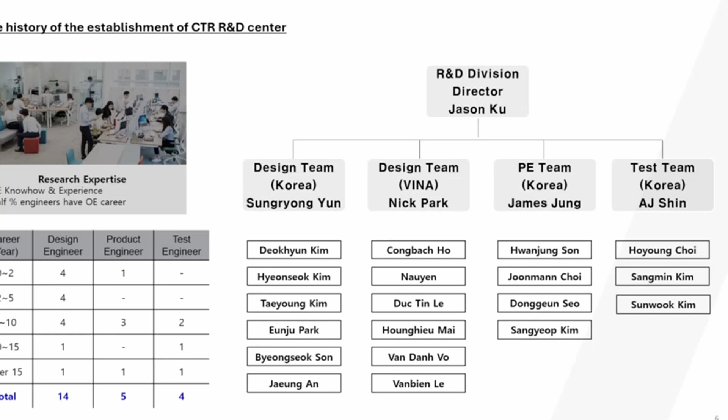We have a diverse and specialized team of researchers. Our greatest advantage is that half of our research staff have design and development experience in the OE sector. CTR core technologies have already been patented worldwide.

We use the latest design and analysis tools to achieve the optimal design that ensures customer satisfaction. Unlike our competitors, CTR conducts in-house analysis and simulation.

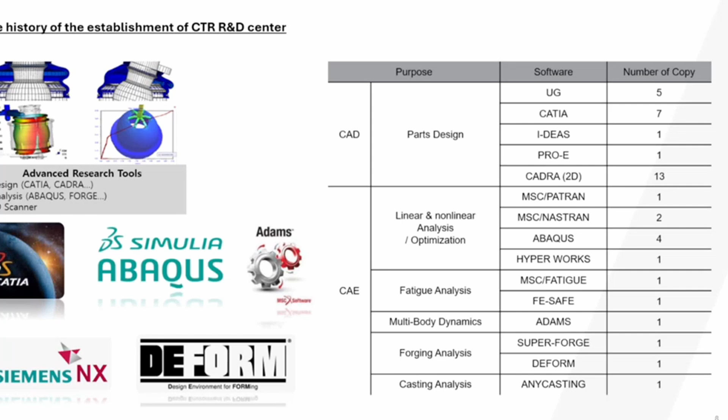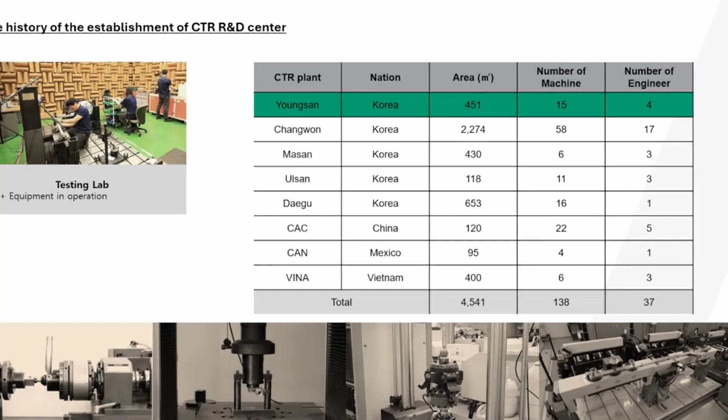All our CTR development products are verified through testing equipment. We are equipped with expert engineers and machinery to create products that meet OE level performance and quality standards.

CTR, as a specialized manufacturer of steering and suspension parts, has material development capabilities. A prime example is the special grease we developed for a ball joint, which is applied to both OE and AM products.

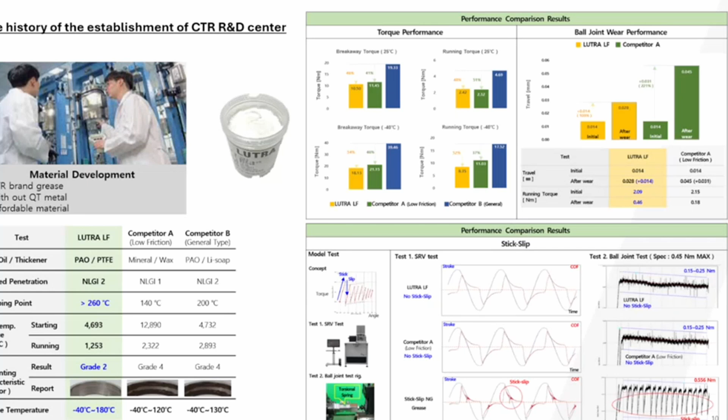We have a specialized 5-step development process. It includes the project kick-off, design, analysis, fabrication, and finally uploading information to the catalog.

The R&D Center of the AM division follows the same procedure as the OE R&D Center. The first step is identifying the product requirement, such as durability and fatigue life.

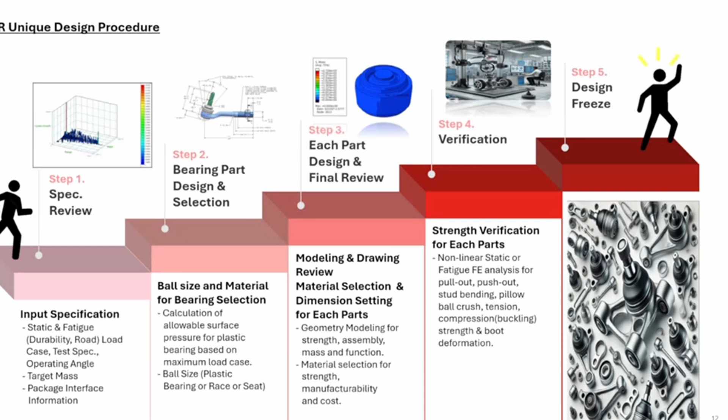In the second step, we design the prototype and select the material. In the third step, we confirm the final design through detailed design and analysis. In the fourth step, we verify the strength through testing. Lastly, if our process passes, the design specifications are finalized for production.

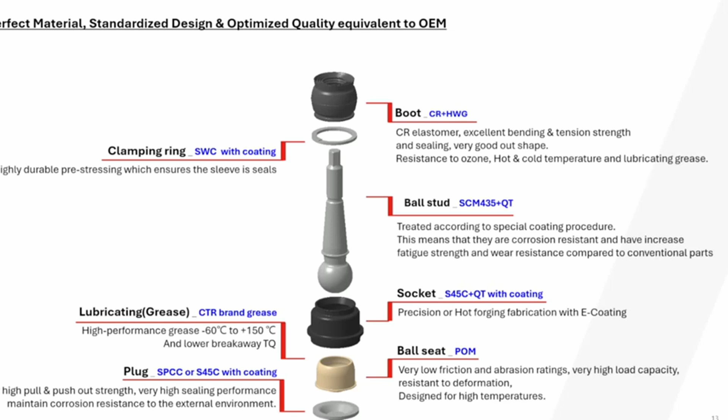CTR ball joint and outer tie rod use the same material and production process as the OE parts. The R&D Center of the AM division follows the same procedure as the OE R&D Center. CTR's philosophy is zero defect. CTR shares experience and know-how between its OE and AM manufacturing systems.

This video is about the CTR manufacturing system.

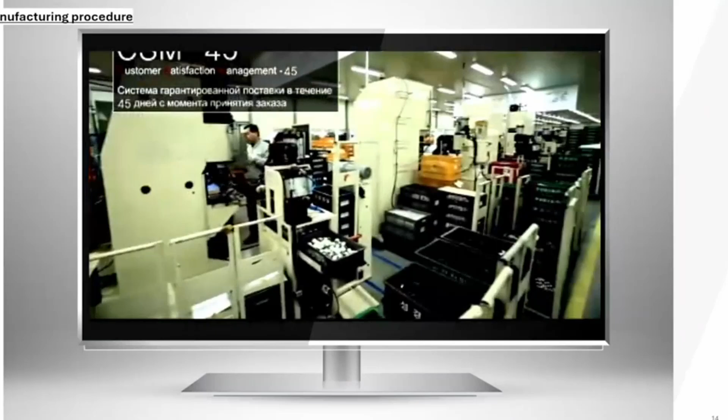Next, we'll explain how the suspension is constructed and where it is mounted. CTR core products include the ball joint, control arm, stabilizer link, rubber bushing, and cross-axis ball joint.

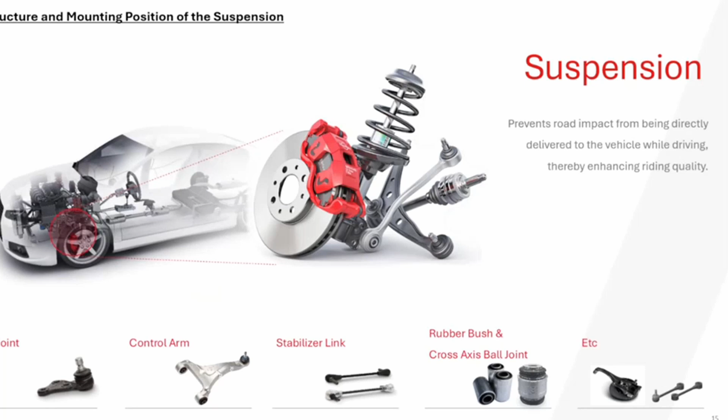The main function of the ball joint is to connect the knuckle to the control arm, allowing vertical movement of the tire and steering movement. During the vertical movement of the vehicle, the ball stud articulates around point A. During steering, the ball stud rotates around the axis point AB.

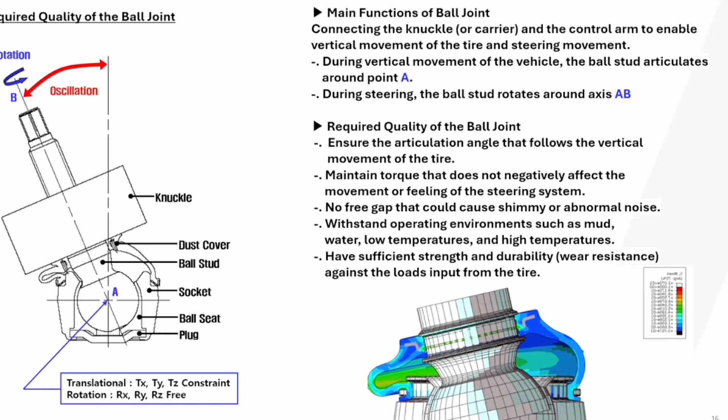There are 5 important required qualities for a ball joint. First, ensure the articulation angle that follows the vertical movement of the tire. Second, maintain torque that does not negatively impact the movement or feeling of the steering system. Third, no free gap that could cause shimmy or abnormal noise. Fourth, withstand operating environments such as mud, water, low temperature, and high temperature. Last, have sufficient strength and durability against the load input from the tire.

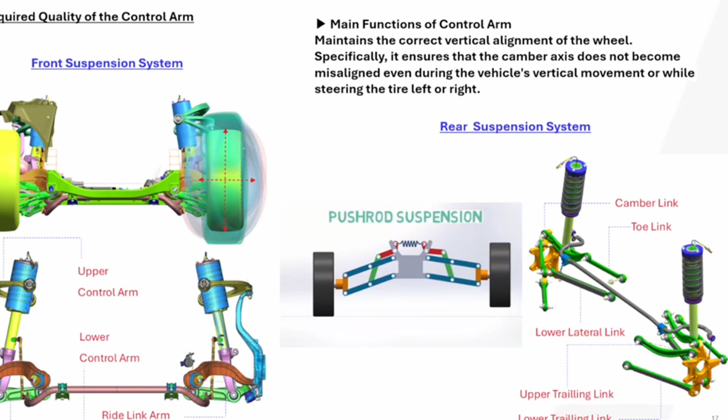The main function of the control arm is to maintain the correct vertical alignment of the wheel, ensuring that the camber axis does not become misaligned even during vehicle vertical movement or while steering the tire left or right.

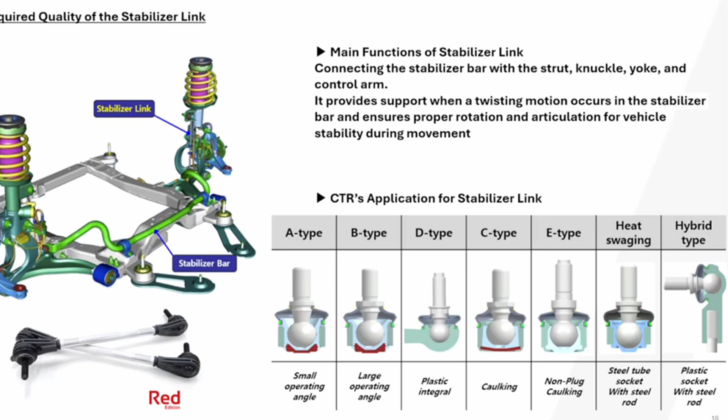The main function of the stabilizer link is to connect the stabilizer bar with the strut, knuckle, and control arm. It provides support when twisting motion occurs in the stabilizer bar and ensures proper rotation and articulation for vehicle stability during movement. The stabilizer link of CTR has a wide range of applications, depending on the size of the vehicle and the quality required.

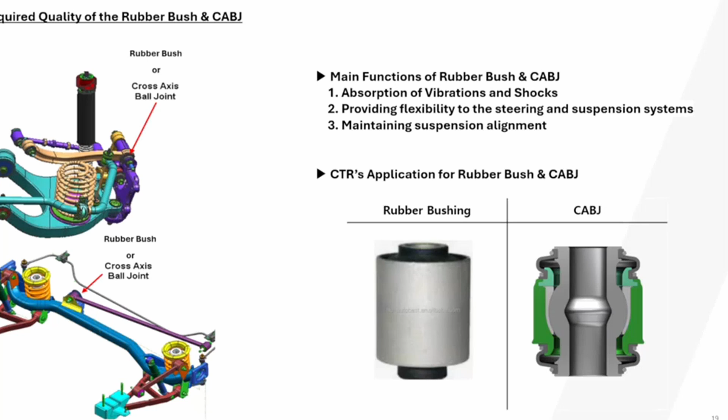Next, we'll explain how the steering parts are constructed and where they're mounted. CTR core steering products include the outer tie rod and inner tie rod.

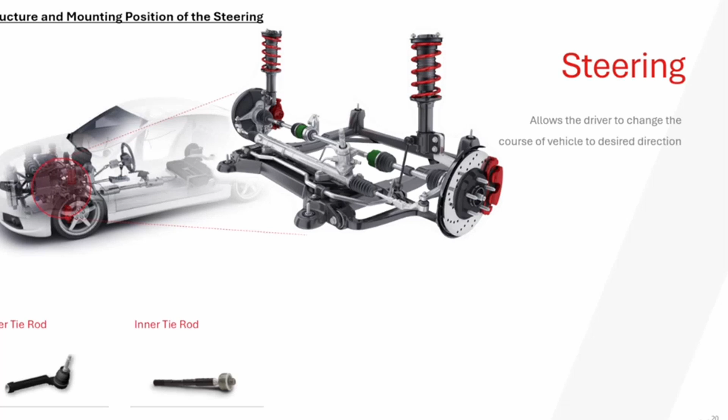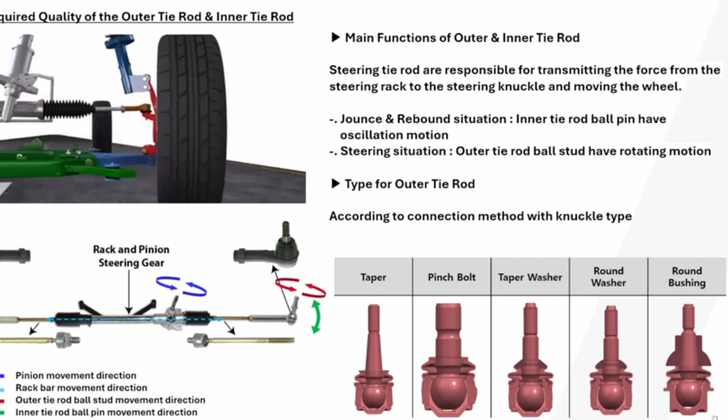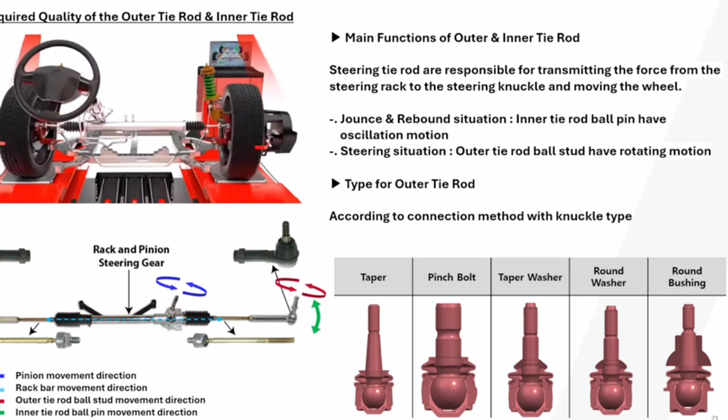The main function of the outer tie rod and inner tie rod is transmitting the force from the steering rack to the steering knuckle, the wheel. The outer tie rod, the CTR, has a wide range of application depending on the installation method and quality required.

And finally, how to use the CTR web catalog. Let's watch the video to learn more.

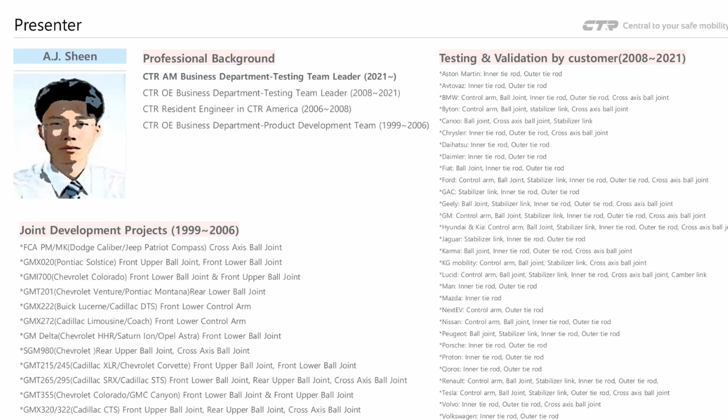This is AJ speaking. I'm in charge of the CTR test lab. As you know, CTR has been supplying ball joints to almost all global automakers for a long time, meaning CTR ball joints are installed in vehicles almost everywhere in the world. In other words, we are very familiar with the extreme environmental conditions around the world. Based on that, I'd like to share our engineering information and knowledge with you here.

This is what I'm going to talk about today. First, let's take a quick look at what a ball joint is. Next is what happens if the joint is separated, what types of joint separation there are, and what are the root causes of them. And last, I'd like to cover what the preliminary signs are before joint separation.

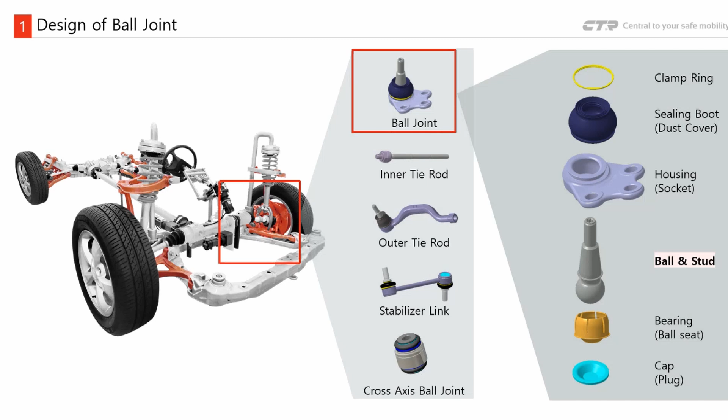Today's topic is joint separation from a car. At this point, we need to be familiar with the name of each joint component: cap, bearing, ball and stud, housing, sealing boot, and clamp ring. Before we jump into the next slide, please remember the names of these components.

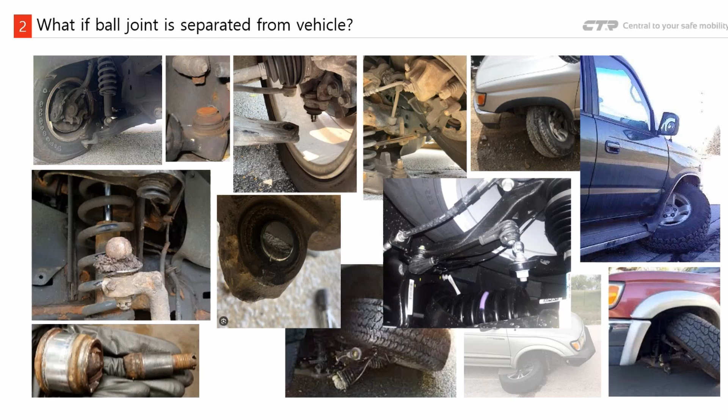If a ball joint becomes separated from a car while it's in motion, it can have serious consequences for the driver and anyone else on the road, because this can lead to steering difficulties or loss of vehicle control, making it difficult to drive and potentially causing accidents. That's why ball joints are designated as safety parts in the automotive industry.

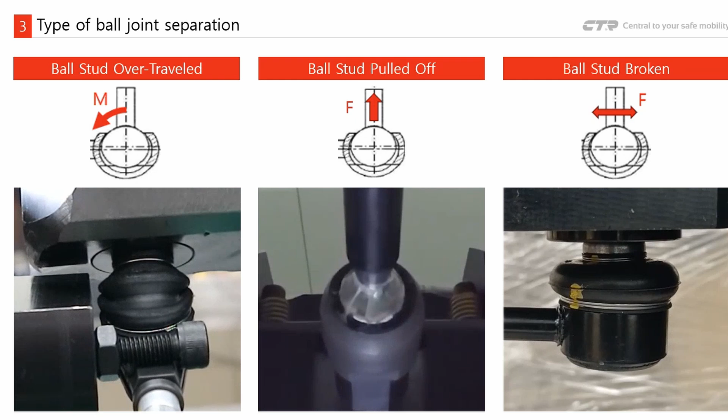In the next slide, I will have the opportunity to look at what evidence remains for the 3 failure modes respectively.

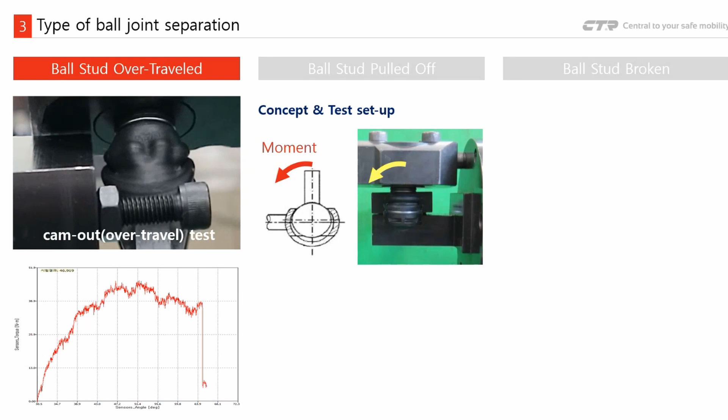This is showing the concept of how ball and stud is separated from housing by over-travel failure. When the ball and stud is tilted and begins to touch the housing, the leverage effect is working. When you look at the parts where ball and stud is over-traveled and separated from housing, we can see a permanent dent on the upper part of the housing, and the stud is bent, but not always. This is because ball and stud generally has the strongest hardness among joint components.

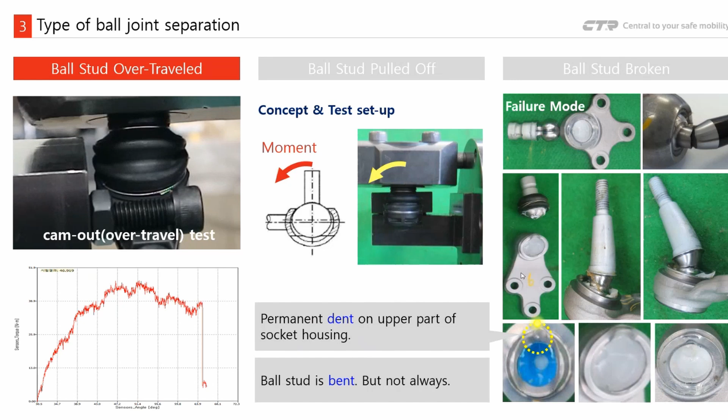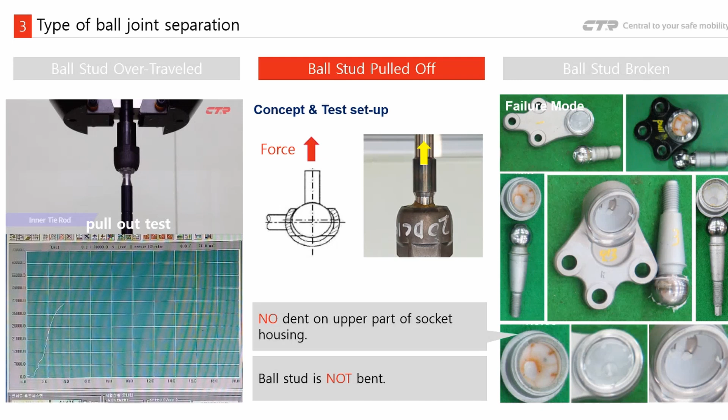This is about how ball stud is broken by dynamic cyclic stress. When you take a look at the general failure mode of it, there is no dent on the upper part of the housing and no bending deformation of the ball stud, but it is just broken. This is a typical failure mode for dynamic cyclic stress fatigue.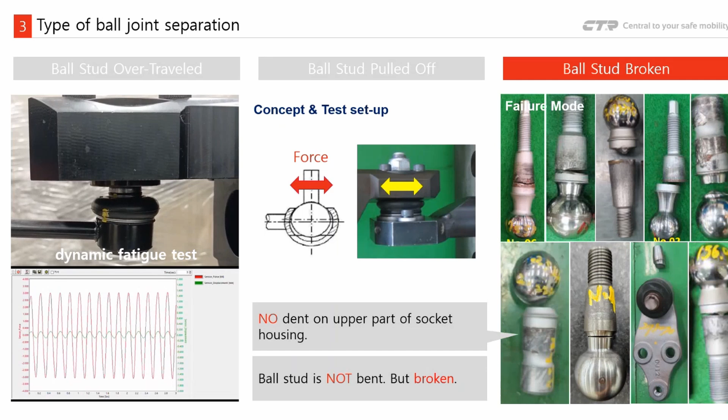Now let's recap the previous failure modes. If you remember the differences among these failure modes, we may be able to tell at a glance what happened on them. The appearance sometimes gives us some idea of what type of separation has occurred.

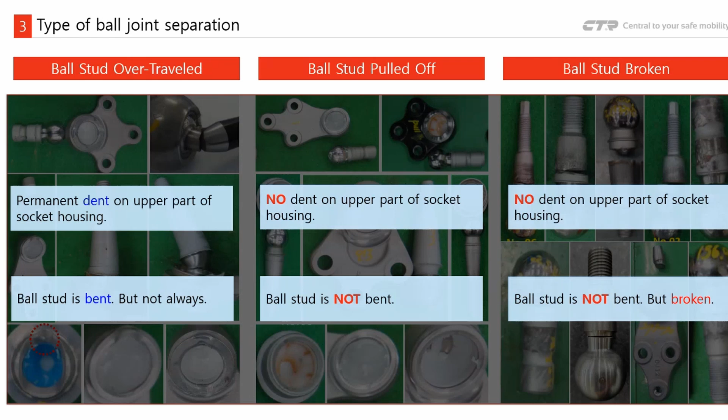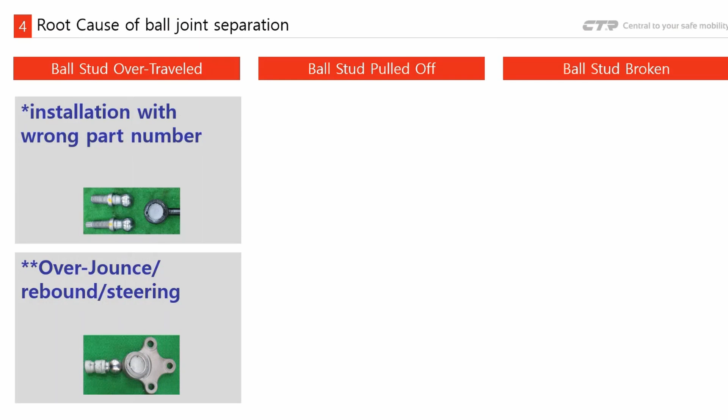Now let's learn about the root causes of these separations. There are two main root causes in regard to balls that over-traveled. Regarding balls that pulled off, there are two main root causes. When it comes to balls broken by dynamic cyclic stress, there are three main root causes. Now let me talk about them in detail one by one in the next slide.

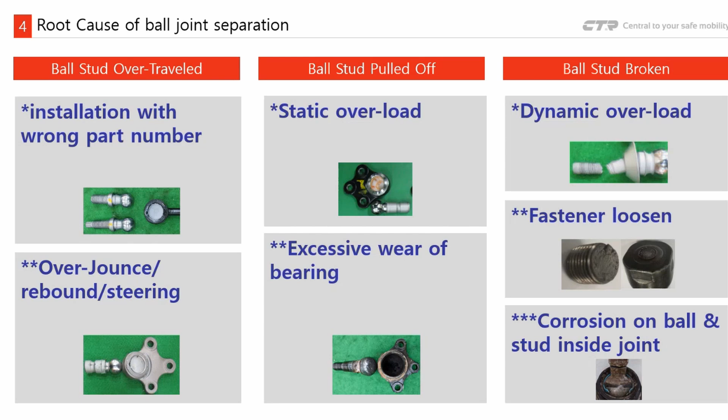This is about one of the root causes of balls that over-traveled: installing with the wrong part number. For example, a part number for the right side of a vehicle is mounted on the left side, or vice versa. Installing different part numbers could cause problems in the maximum operating conditions of the suspension or steering system. That's because permanent deformation of the stud begins to occur if it goes further than the blue zone shown in the middle picture.

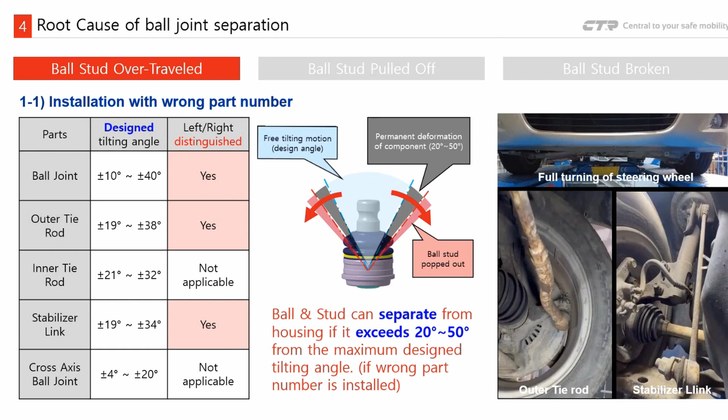Ball joint, outer tie rod, and stabilizer link may all have different part numbers on the left and right side of the vehicle. This problem mainly occurs in the stabilizer links. Therefore, please make sure your vehicle's left and right part numbers are different or the same before installing these parts.

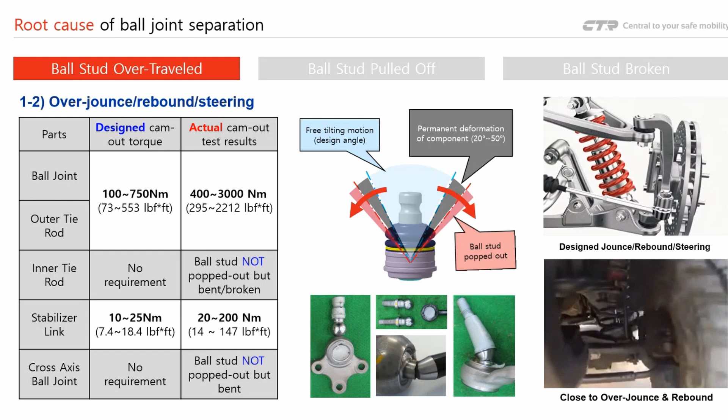Here I want to talk about another root cause of a ball stud over-traveling: over-jounce, over-rebound, over-steering. The table on the left shows the designed cam-out torque values and the actual test results for each joint type. Stabilizer links typically have lower torque values than the ball joints and outer tie rod due to the smaller ball size. Therefore, stabilizer links tend to have more problems with balls that over-travel than other joints.

This is about one of the root causes of a ball stud straight pulling off: static overload. The graphs here show ball and stud pull-off requirements and the actual test results for each joint type in the global automaker database. For example, the graph in the top left is about the upper ball joint.

The X-axis on the graph means the ball sizes, and the Y-axis is pull-off force values. What's interesting here is that as ball size increases, the pull-off requirement does not increase proportionally. In other words, there's no pull-off force increase in the actual car, regardless of vehicle type or weight.

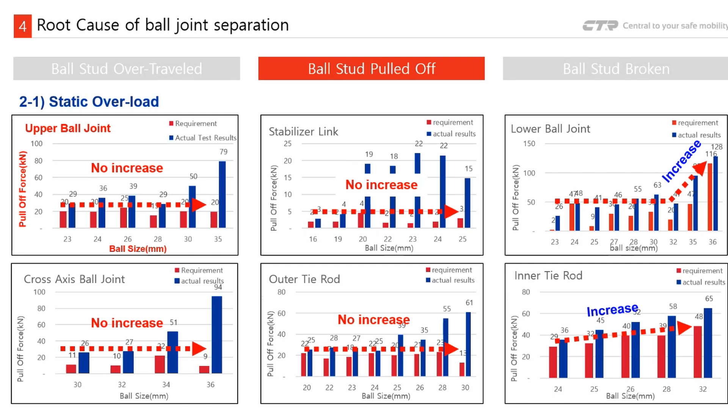The same goes for stabilizer link, cross-axis ball joint, and outer tie rod. However, for inner tie rod and lower ball joint, as the vehicle becomes heavier, the stud pull-off load tends to increase proportionally. As a result, it can be predicted that stud pull-off separation due to overload is very unlikely to happen in a real vehicle.

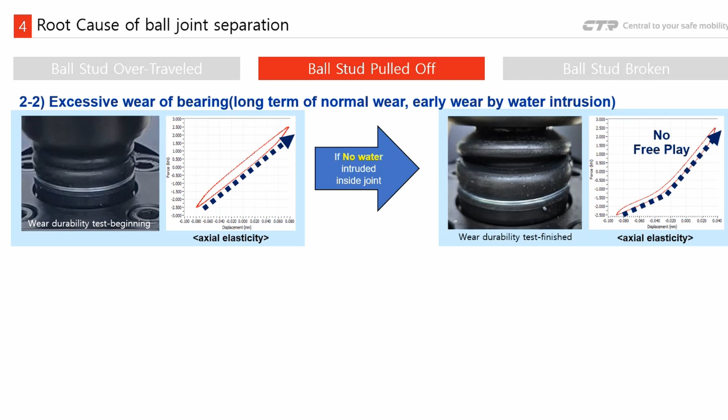After the wear durability test is done with a good part, the graph could be slightly curved like this—it's still good. However, if foreign matters or water enter inside the joint, or the vehicle is driven beyond the designed mileage, the axial end travel curve lies horizontally in the middle part of the graph, as shown in the picture. We technically call this free play, which may produce noise or vibration in the car.

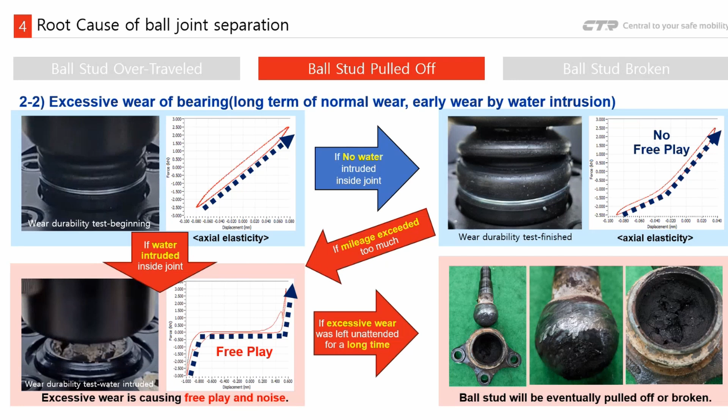If this condition is left unattended for a long time, the stud eventually will be pulled off or broken. In other words, this can happen if the driver has not had a chance to notice the various symptoms of the problem.

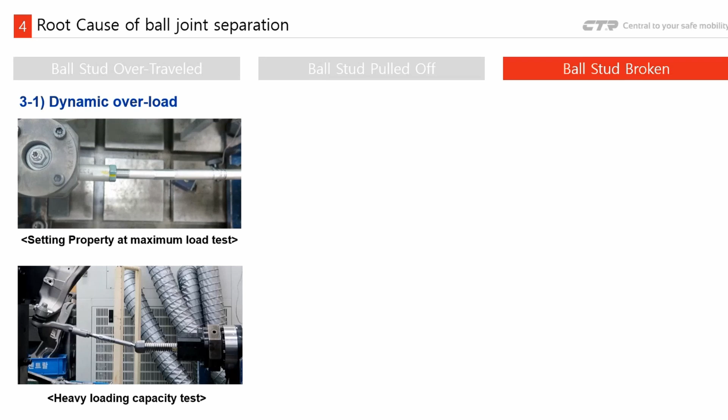This is about one of the root causes of a ball stud breaking: dynamic overload. In the automotive industry, joint suppliers conduct a test based on the assumption that a vehicle would be subject to high loads close to its yield point, one time to one hundred times over its lifetime. When heavy load is applied, as shown in the video on the left, the part experiences elastic deformation repeatedly.

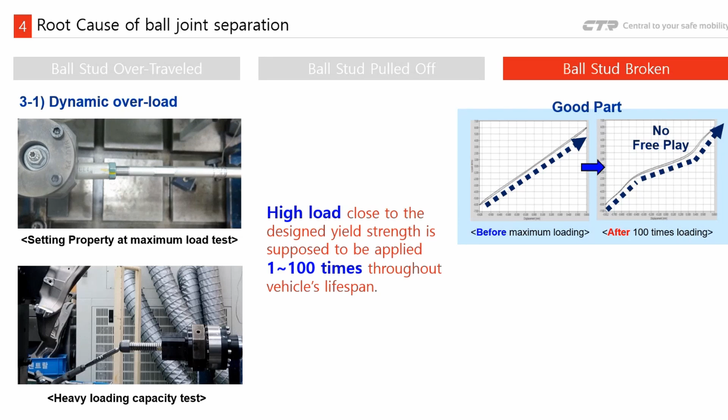After the test is successfully completed, the axial end travel curve on the joint could be slightly bent in the middle part of the graph, though there should be no screw loosened nor broken parts. If the test fails, there could be free play, a loosened screw, or a broken component.

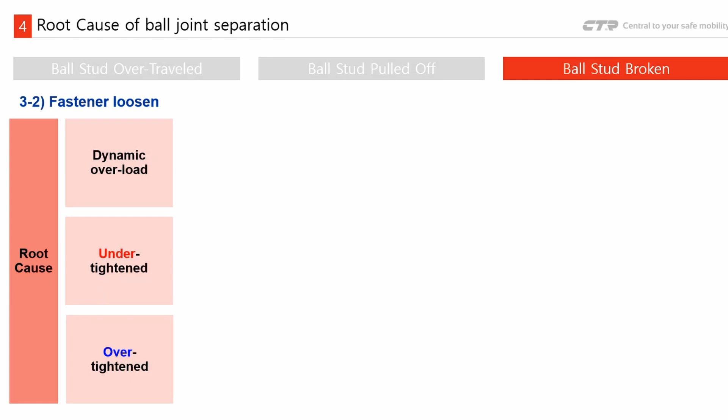There's another root cause of a ball stud broken: loosening of screws. If your vehicle's screws become loose, they will initially make noise or lose functionality of the part, eventually causing parts to break.

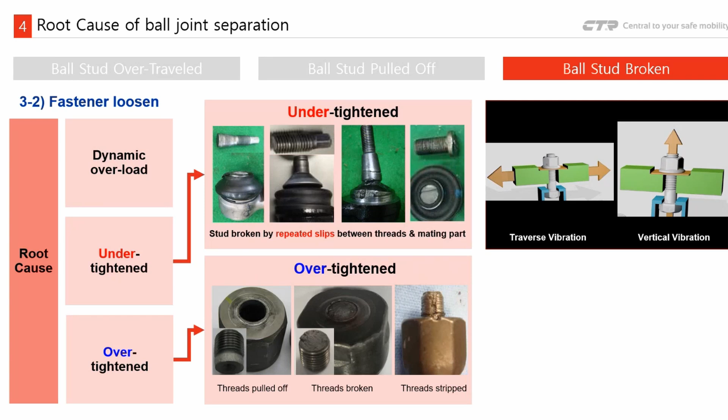If we tighten a screw lower than the specified values, the screw may loosen while the vehicle is in motion. On the other hand, if we tighten a screw too strongly, beyond the yield stress, the screw may also break. I'd like to give a little bit of a principled explanation as to what's going on.

In general, tightening torque conditions are determined within the elastic region. However, if tightened outside the elastic range, the screw may be permanently deformed or broken if extra load is applied to the car in motion. That's why screws must be properly tightened according to the instructions provided by automakers.

This is the last root cause of a ball stud broken: corrosion inside the joint. As previously explained, with excessive wear of the bearing, the end travel curve should be linear at the beginning. But if there's water intrusion inside the joint before or during testing, the steel component inside the joint gets corroded and may produce noise or vibration in the car, like this.

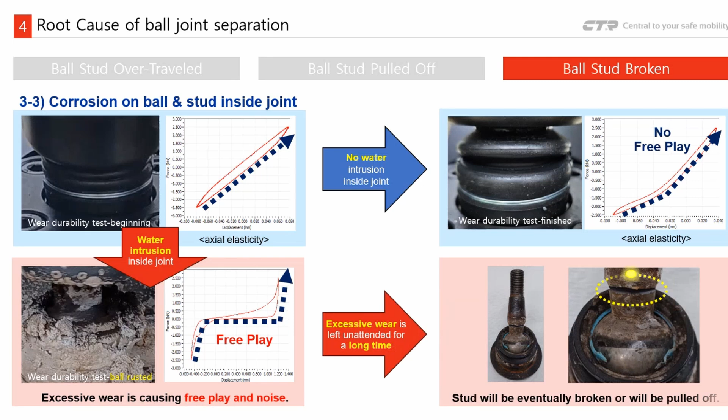If this condition is left unattended for a long time, the stud eventually will be pulled off or broken. Now let's find out what preliminary signs appear before the joint is separated.

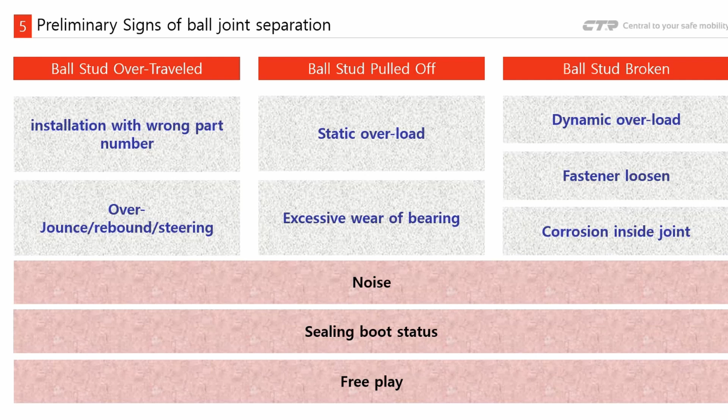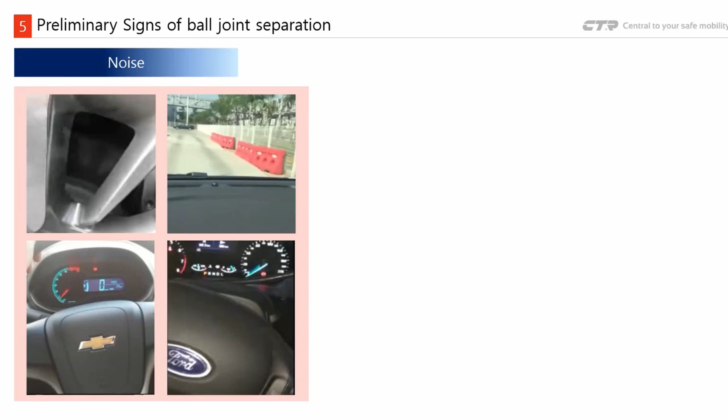These are preliminary signals before separation of the joint: noise, sealing boot status, and free play. The preliminary signs listed here are ones that drivers may recognize and notice on a regular basis. If a driver begins to hear noise from a vehicle's steering or suspension system, it must be a preliminary sign that there is a problem with the components.

Here are some examples of noise generated by joints: a squeaking noise here. In reality, this squeaking noise does not occur directly inside the joint. A slight vibration occurs at the joint first, and the vibration is amplified in the connected part, resulting in noise.

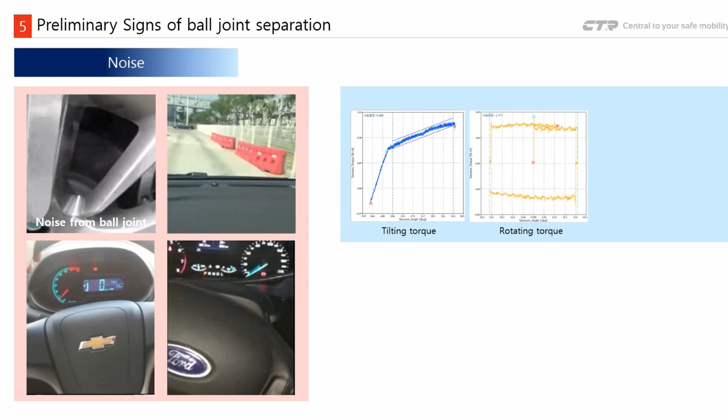We measure the friction torque of a good joint. It'll look like this, but a noisy part will look like this—this spike shape in the friction torque causes vibration inside the joint, eventually resulting in noise in the connected part.

Now let's listen to another type of noise: clunk noise from a stabilizer link. This noise comes directly from inside the joint of the stabilizer link. When you separate the part from the vehicle and measure its axial end travel, the good part will look like this—it's linear.

However, the noisy part will look like this, showing typical free play inside the joint. Let's listen to another noise that can be heard from inside the car when operating the steering wheel.

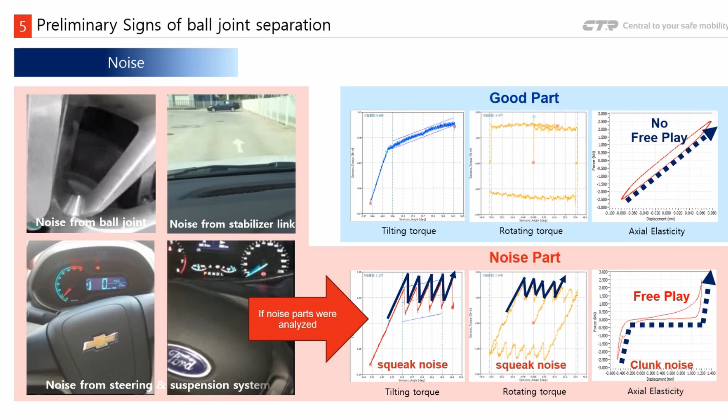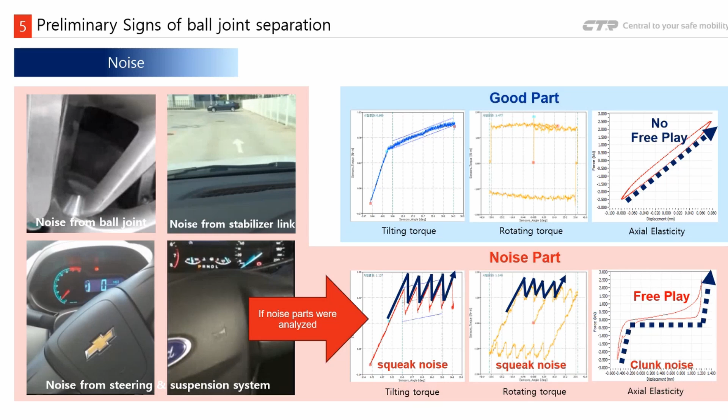Yeah, this is also caused by a vibration inside the joint, and the vibration amplified in the connected parts, resulting in noise. In any case, if you hear noise, this is a preliminary signal that you need to take some actions.

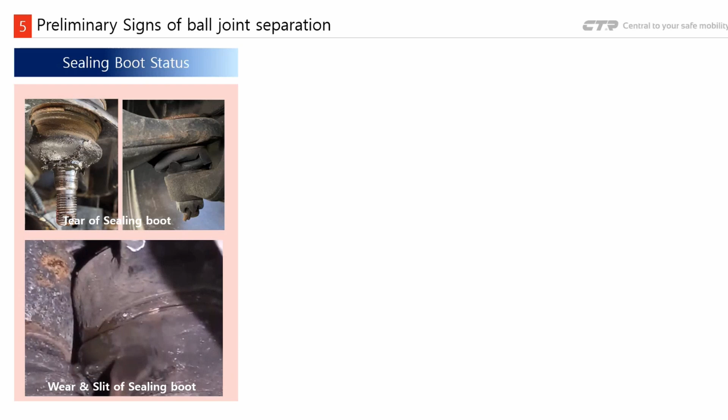If you have a chance to take a look under the car, we might be able to get more information. If the sealing boot fails to prevent foreign matters from intruding inside the joint, the lifespan of the joint will be drastically shortened. Here I will show you the typical failure modes of a sealing boot classified in the automotive industry.

Punctures are caused by an impact from a hard object or tool, often caused by objects bouncing off the road, sometimes created while people install the joint on the car.

If a slit or a crack on the sealing boot occurs in the horizontal direction, it is most likely due to wear. As the ball stud in the joint move repeatedly in the tilting angle, the sealing boot wears out due to contact with the rubber itself or contact between the rubber and the housing.

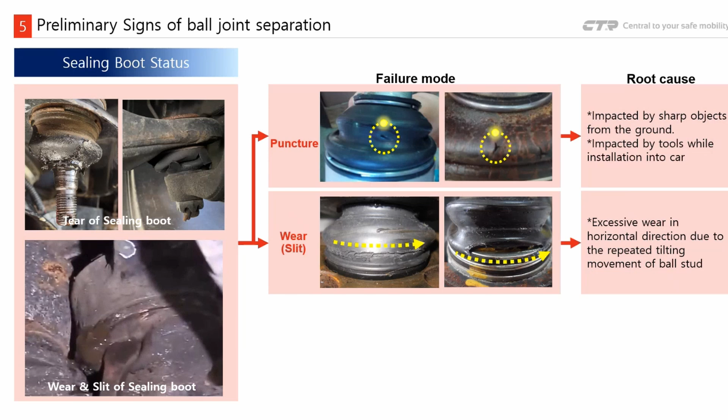If the sealing boot is torn in a complex shape like this, there is a possibility that the sealing boot design is bad. I will show you why it is a bad design of part in the next slide.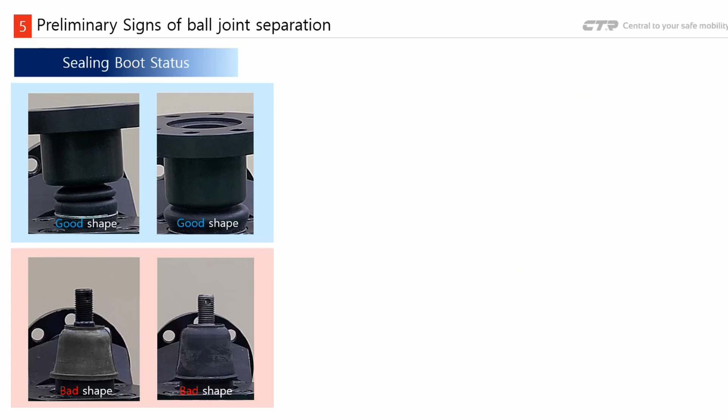And the videos at the bottom show what a bad sealing boot looks like when installed in the mating part. Do you see the difference between good parts and bad parts? The bad sealing boot becomes wrinkled and distorted after being assembled with the mating part.

What would happen if I drive the car with these bad parts installed? Now let me show you what happens.

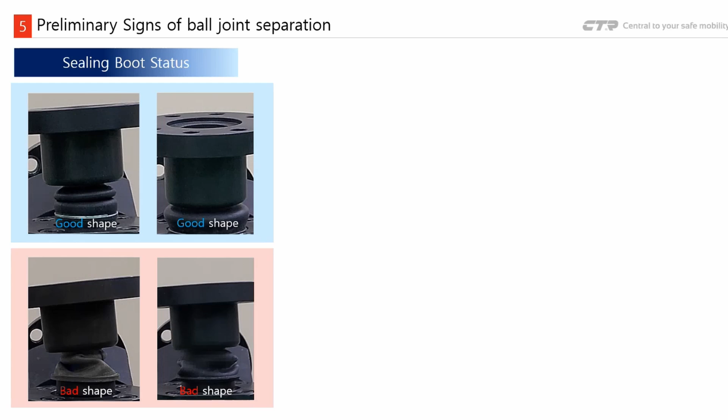Car makers in the automotive industry have their own environmental simulation test requirements. As the joint moves, the atmospheric temperature goes back and forth between extremely low and high temperatures, and water mixed with mud and salt is periodically sprayed onto the joint.

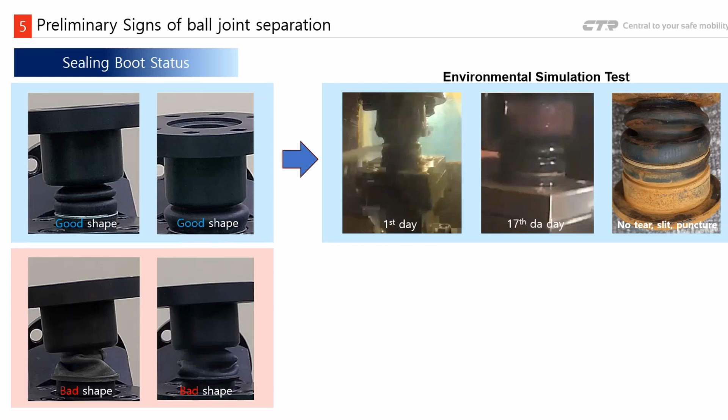Here's an example of an environmental simulation test result conducted by an automaker in North America. Good-shaped sealing boot appeared to have no visible abnormalities until the 17-day testing was completed. But bad-shaped sealing boots were found torn just on the second day.

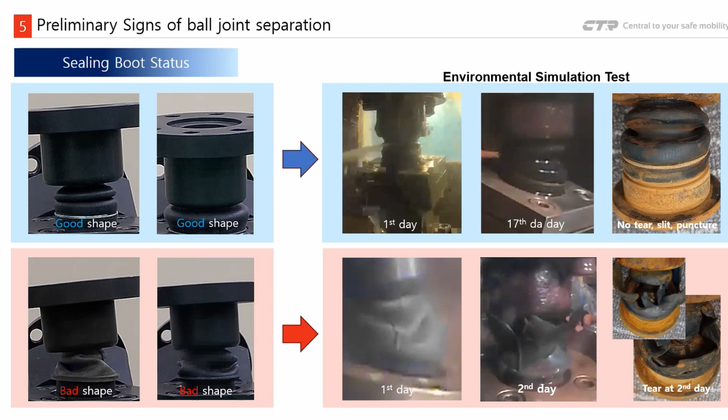In other words, if the sealing boot is assembled in a bad shape, the service life decreases to less than 1 out of 10 of a normal boot.

Last but not least, this is about free play as a preliminary sign of a joint separation. If you can lift the vehicle using some kind of equipment, you can try shaking the wheels. If you feel a gap while you are shaking the wheel from side to side or up and down, it must be one of two things: free play inside the joint or screws loosened.

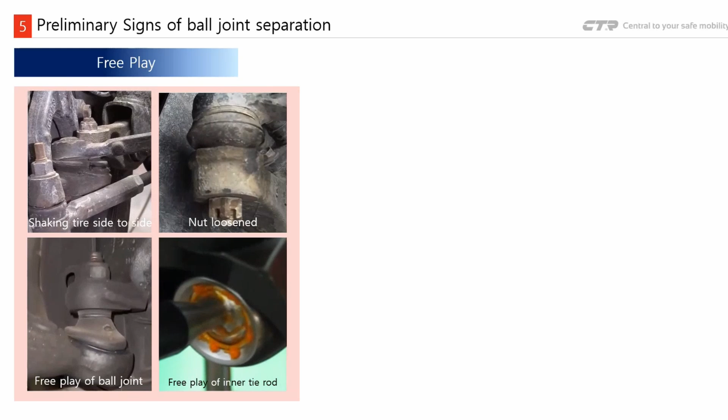If the free play is not due to fasteners loosening, a gap must be created between the ball and bearing inside the joint. There will be almost no friction torque, like this graph, and typical free end play. This free play is likely to eventually develop into noise.

On the other hand, good parts still have some friction torque values, and the end travel is linear or close to linear.

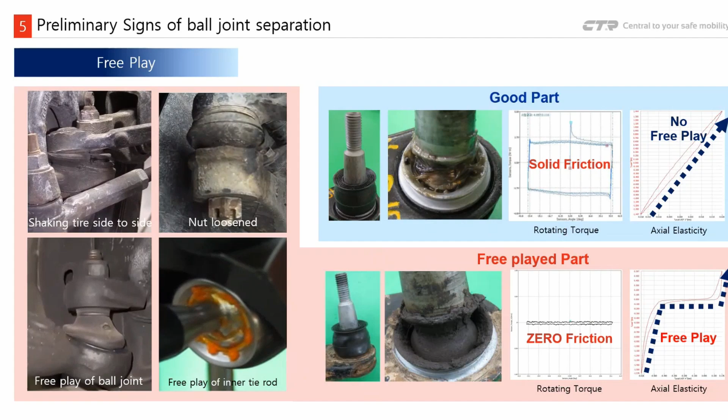Now let's recap what I talked about today. There are three kinds of joint separation: over-traveled, straight pulled off, and broken by dynamic cyclic stress. You could estimate the root cause from the type of joint separation.

I talked about the existence of a dent mark on the upper part of a housing and bending of a stud. You should install the joint with the correct part number. You must check whether or not the left and right part numbers of the vehicle are different before installation.

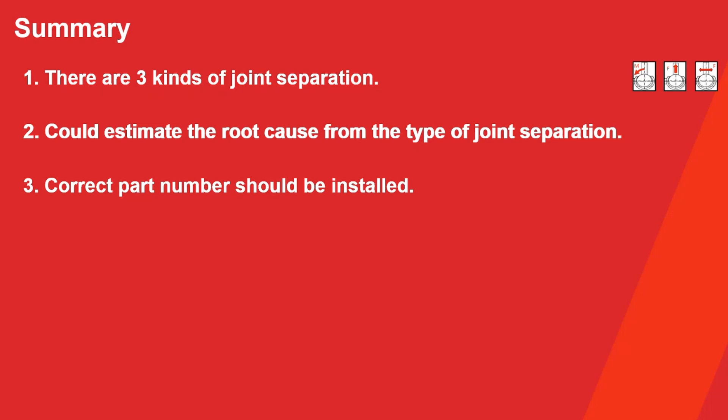Screws must be tightened to the correct values according to the instructions. They should not be over-tightened nor under-tightened.

Abnormal shape of the sealing boot should be corrected. Please take immediate action if the bush shape is found to be wrinkled or distorted under the car.

Joint separation could be prevented through periodic observation by monitoring noise, the sealing boot status, free play, and so on. You can avoid the worst case scenario.